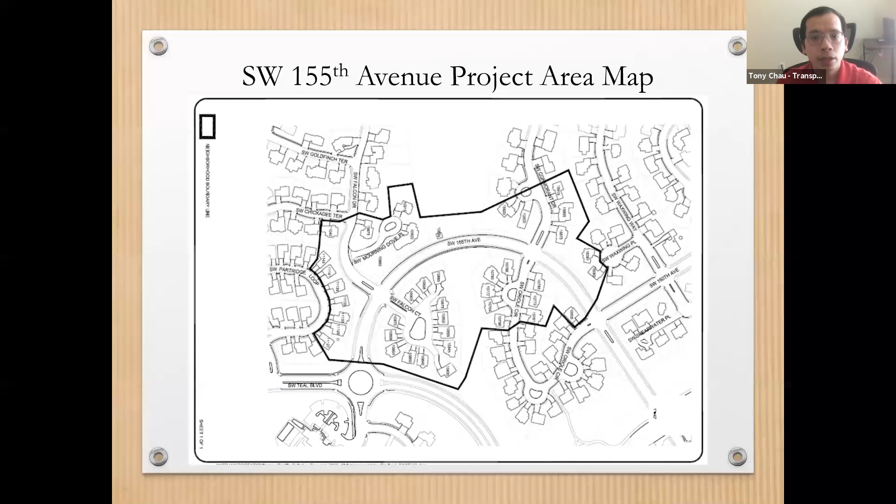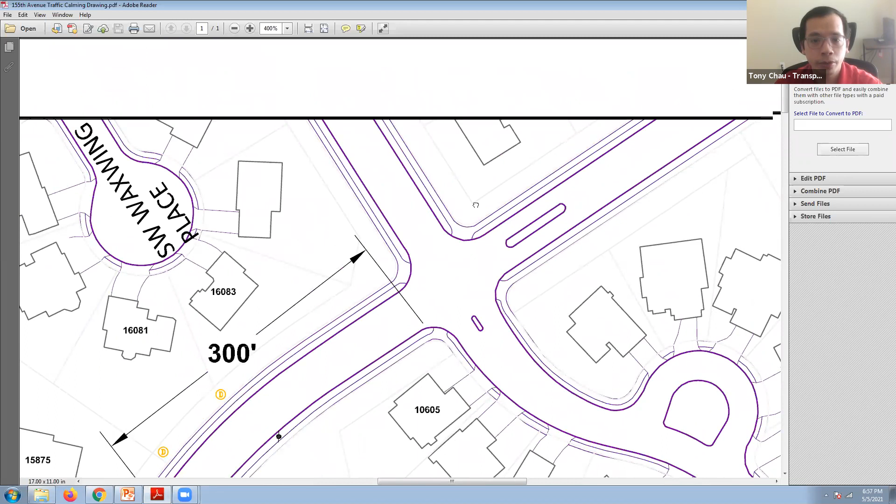These are the locations we picked out for traffic calming, and I'll show you in more detail. Going location by location, the first location we picked out starts from 160th Avenue, at the all-way stop control at 160th Avenue and 155th Avenue. If you go 300 feet, the first location we picked out is 15875 Southwest Cormorant Drive or 10785 Southwest Oriole Circle.

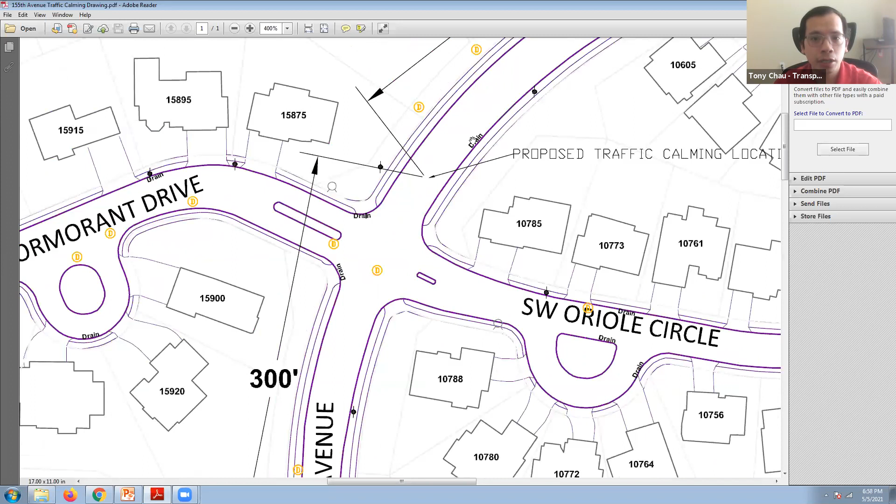On the map you see a lot of random icons: this is a storm drain, this is a manhole, fire hydrant, and this is a power pole or light pole.

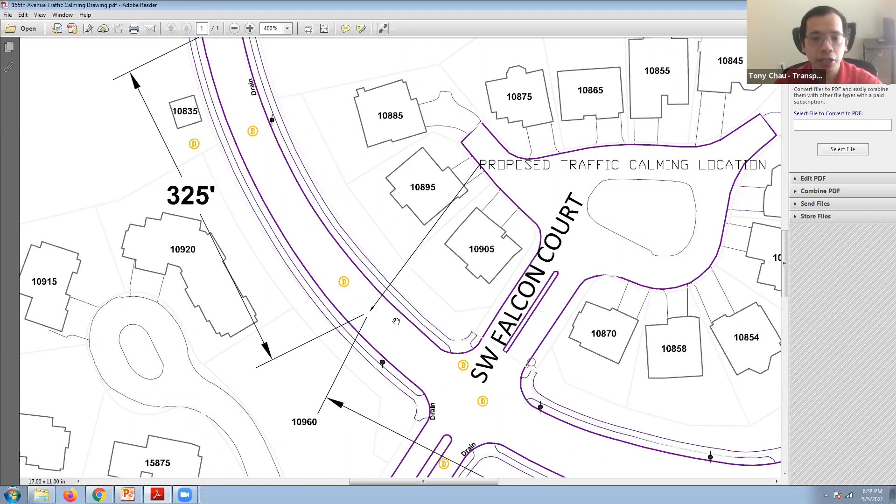As you go further down Southwest 155th Avenue, the second location we picked out is right near the pump house on the curve at 10835 Southwest 155th Avenue. Further down, it's at 10960 Mourning Dove Place or 10905 Southwest Falcon Court. There'll be one more set of speed traffic calming location, roughly 350 feet from the roundabout at Teal and 155th Avenue.

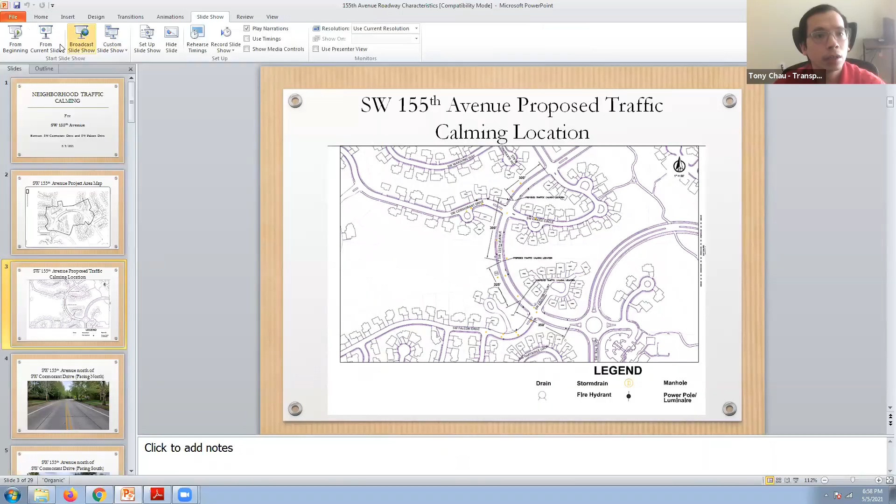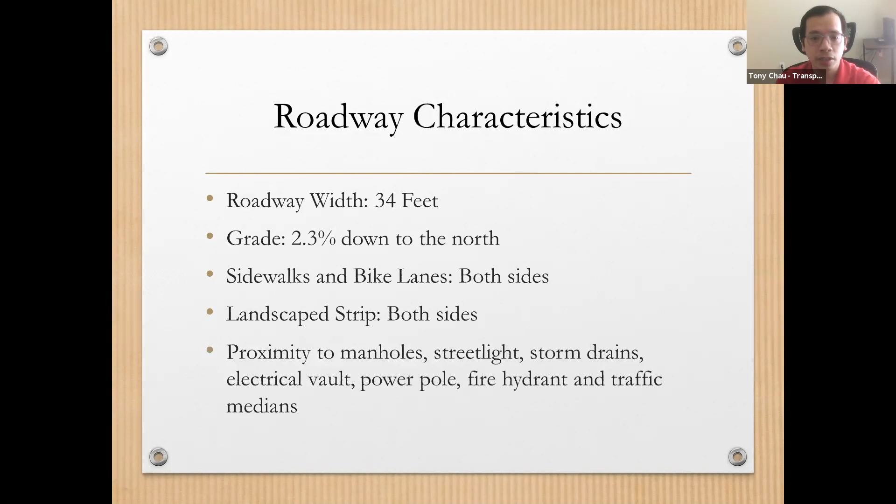The roadway width is 34 feet, 2.3% grade down to the north. There are sidewalks, bike lanes, and landscape strips on both sides, plus manholes, street lights, storm drains, a vault on the east side, power pole, fire hydrant, and traffic medians on the side street that we consider.

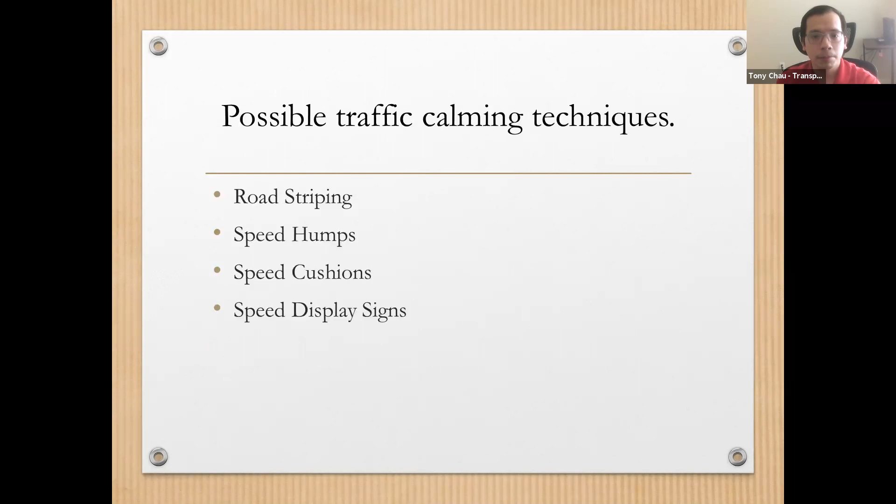This concludes the PowerPoint portion of our meeting. I'll go over the map one more time, location by location, just briefly.

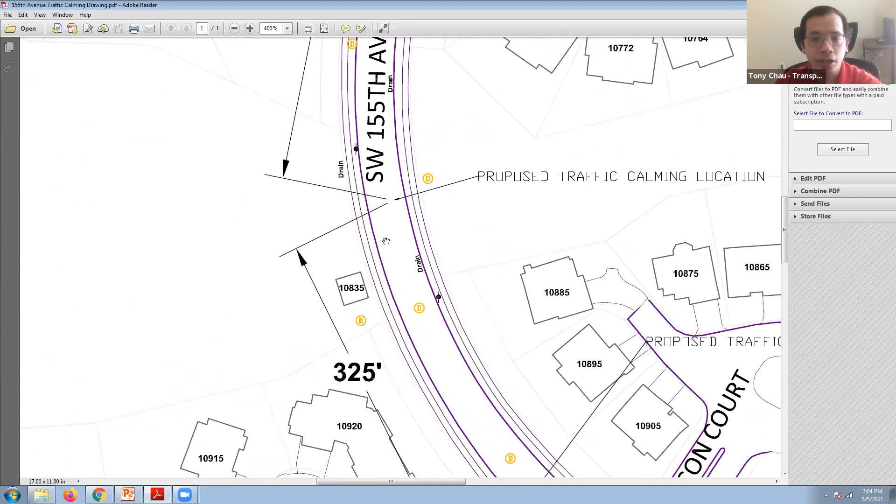The first location is north of Cormorant Drive and Oriole Circle, at these two houses: 15875 Cormorant Drive and 10785 Oriole Circle. The second location is at the pump house, 10835 155th Avenue. The third location is 10905 Southwest Falcon Court, or 10960 Morning Dove Place.

At this point, you'll get to the traffic circle, which is 350 feet away. This concludes the PowerPoint and map presentation part of the meeting.

Mr. Khasho, do you have anything to add?

Mr. Khasho, we can't hear you. Sorry about that.

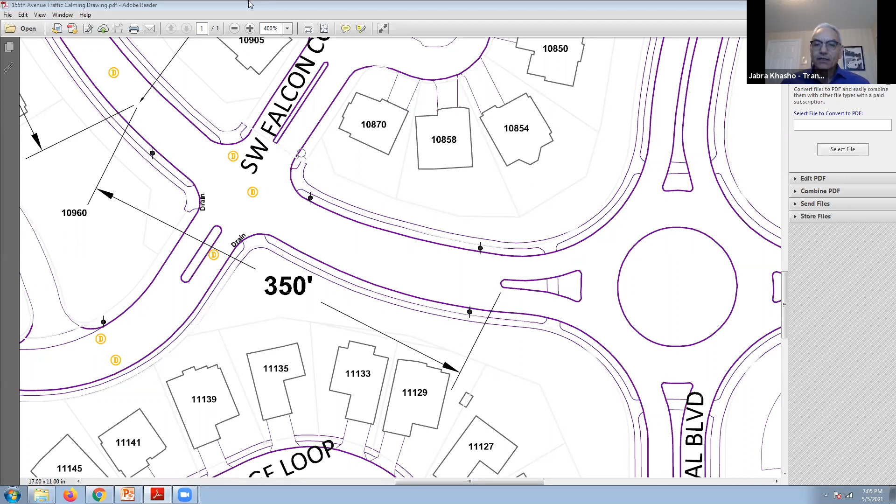We have to look at 155th Avenue, it's a street with bike lanes and a center line. At the last meeting, we showed many options for traffic calming devices and talked about the pros and cons, advantages and disadvantages, for each device. But if you look at the street, we're kind of limited in what we could have there.

We talked about curb extensions and islands. The problem is if you try to put in a curb extension on the street, you'll end up wiping out the bike lane. This is classified as a collector street, so bike lanes are required.

The same thing with medians. If you put a median in, you need at least a 14-foot lane next to it to allow a bicycle and a car to go at the same time. At the same time, you'd be cutting off the bike lane, and that's not a good thing. So we're limited to what we could use on the street.

We could use speed cushions, we could use speed display signs. At the last meeting, I mentioned that speed cushions are probably the best device to reduce speeds and cut-through traffic. Also, speed cushions will not impede emergency response vehicles. I keep mentioning this because it is important.

Fire department, every second is important for them to reach whatever is happening. They have to get there, and every second helps save a life. So that's why I encourage you, if you choose speed humps, go with speed cushions because of the emergency response time. Speed cushions and speed humps have the same effect. They both work, although drivers tend to keep two wheels in the gutter and two wheels on the speed hump. By the time they try to center the car, they've already slowed down.

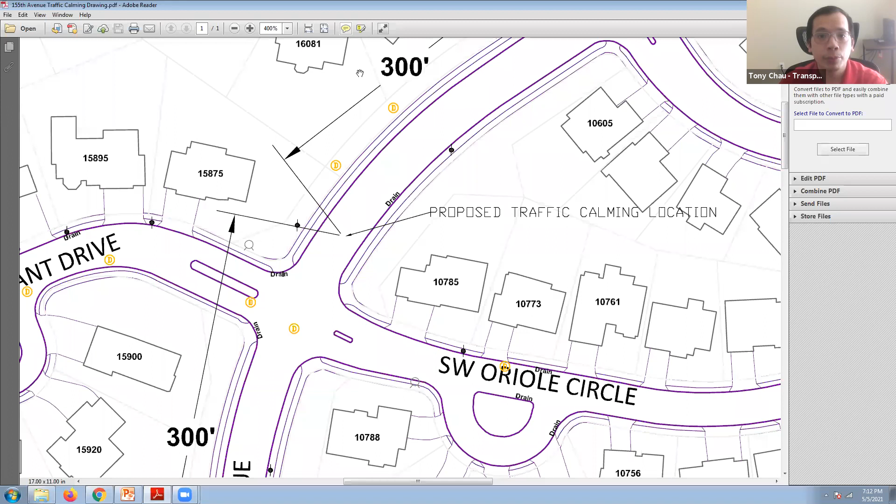We'll give it one more minute for people to provide their input. It looks like the numbers stopped increasing, so we'll take a look at the chat box at this moment. As you can see, on the first one: speed hump cushions, speed cushion, speed humps, cushions, speed humps, speed cushions, and speed cushions. So it looks like the majority of our panelists want speed cushion at this location. Let me double check that, make sure I don't miss anybody. Yeah, it looks like a majority wants speed cushions.

We also have one person with their hand up. Diana, can you speak?

Sorry, my internet was crashing on me, so it's coming in and out. I had a question I put in the Q&A, but I thought I'd ask the group to make this more interactive. I was interested, Tony and Jabra, on how the locations are determined. I got to see you guys out there doing some work last week, which was fun. Also, does it have to be one or the other, or can you do cushions and signs? Is that an option, or is there the option to do more than just one?

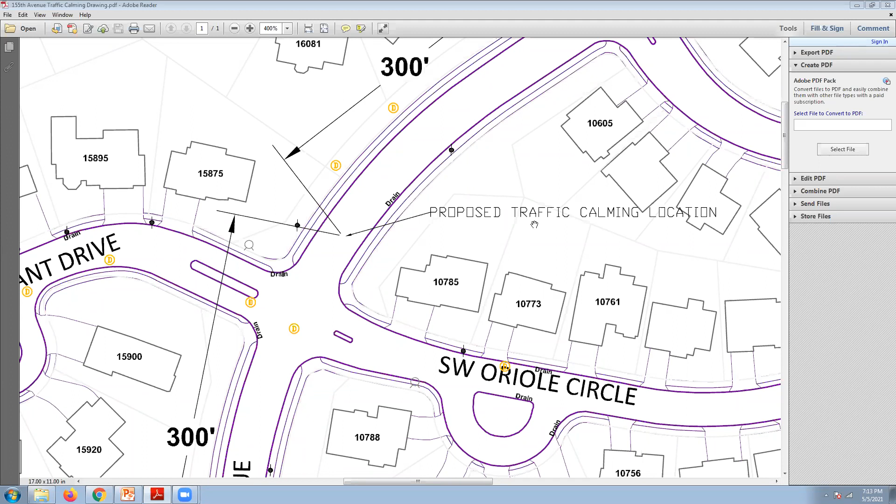Yeah, I'll go back and explain why we choose these locations. Typically, traffic calming devices work best if they're spaced between 300 and 350 feet. We could push it up to 400, but we found 300 to 350 works best. So what we did is divide the street into 300 foot sections. This is the first section coming from Cormorant Drive.

The reason we did not consider anything on Cormorant Drive is that it's an all-way stop, so drivers are basically going to stop and are starting to move from a stop, already at 0 speed. By the time they get 300 feet and up to speed, there will be a device there, like a speed cushion, that will keep the speed slow past that point. That's how we divided the street into sections based on those 300 to 350 foot sections.

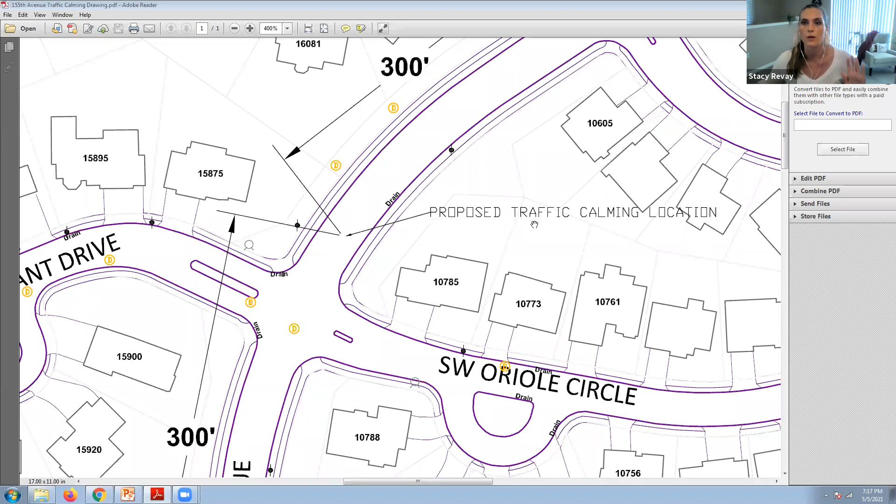This comment about the 325 feet location of the speed hump or speed cushion, that's definitely something we can consider. Let's see—I don't want to miss anything related to speed cushions. One second, Stacy.

A stop sign is already at Cormorant, so I believe you're asking about all-way stop control, which is separate from traffic calming. And once again, the crosswalk—if you do a speed hump, it could function as a crosswalk, like we mentioned at the last meeting.

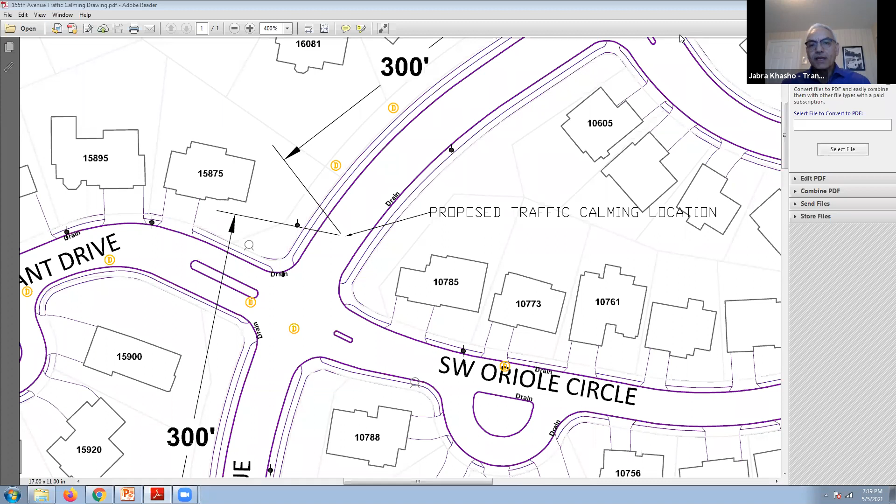Tony, do you know the average daily traffic on 155th? Yes, one second. I'll go back to the slide with the two speed study locations. Here's the first location. The second location has 5,338 vehicles, and that's the one south of Cormorant Drive.

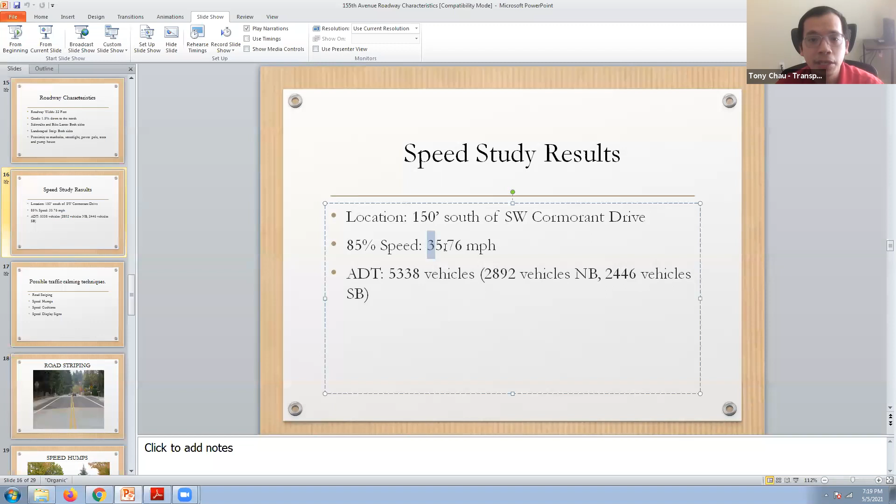And the speed is almost 36 miles per hour, whereas at the other location it's 30.11 miles per hour, and the ADT is about 4,700 vehicles.

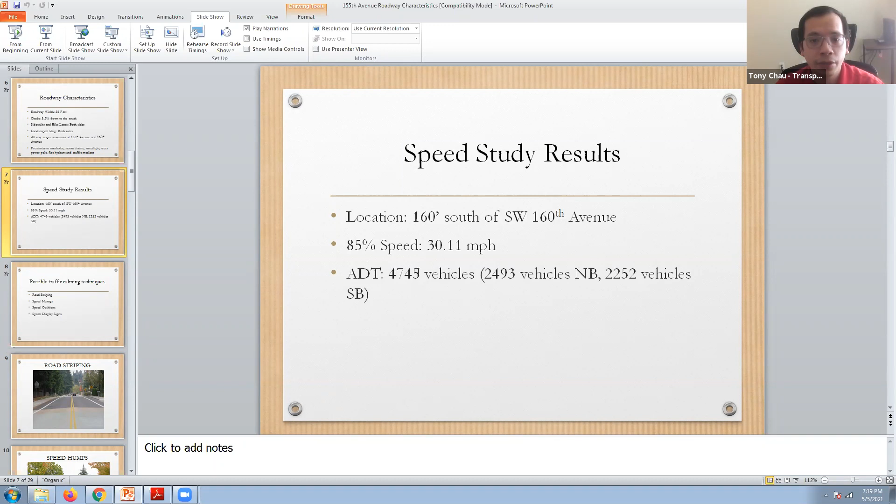So we have some national standards we need to follow on center lines. Typically, if the street has 6,000 vehicles per day, we must have a center line on the street. If it's less than 6,000 vehicles per day, that center line is not needed. If the neighborhood chooses to take that center line out, we could do this.

But we also have to look if there are any sharp curves where the center line is important, especially at night, when drivers going a little fast sometimes start going over the center line and encroaching onto the other lane. So a center line will help with that.

Other things we could do: take the striping out and just leave some reflectors in the middle of the street, which helps take away that feel of a high-speed roadway. We could do this if you want to consider it as part of the plan.

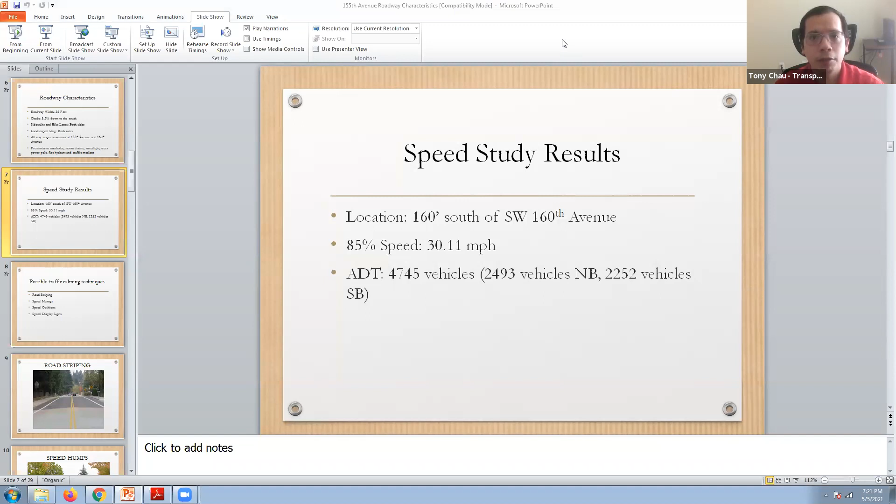We'll go ahead and start with the first question, this one from Steve. I assume traffic count numbers on 155th south of 160th are substantially higher than north of 160th. Is that the reason there are no center lines or bicycle lane lines on 155th north of 160th?

Jabra? I think I just answered this question, explaining the center line option.

Does the city-owned address at 10835 Southwest 155th count as a voting property? It does, but if it comes down to that last number needed to reach the 67% threshold for the project to be approved, that number will be waived, because it's city-owned and we're not supposed to have input on this. But we don't anticipate that number being the difference between the project going through and not going through.

Some studies have shown that removal of center lines on roadways reduces traffic speed. Is that an option on 155th between the traffic circle on Teal and 160th for consistency along 155th? Yes, I explained this, it's an option since the average daily traffic on it is less than 6,000 vehicles per day.

But we have to be careful about the curves in the street, so we have to treat those curves with some type of center line. If it's not a painted center line, we could put some reflectors, which we call buttons that reflect at night. So we could have a few of those around the curves.

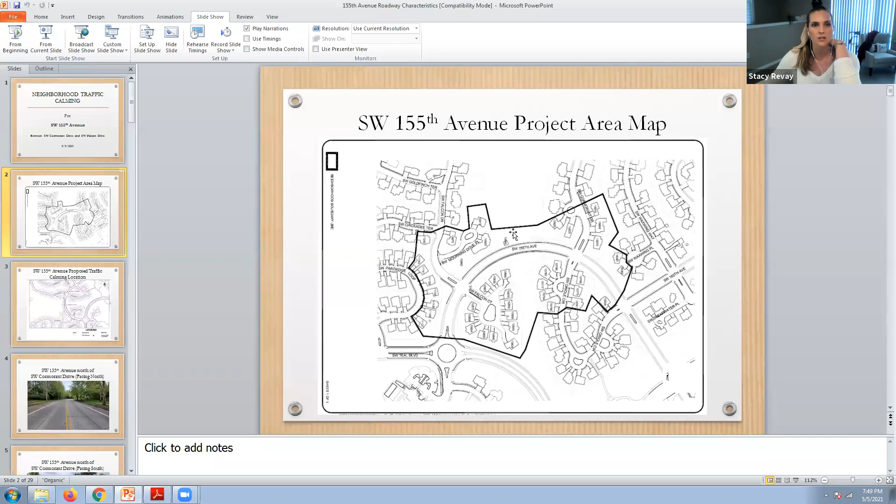The next question, I think we've already answered. Someone asked: are you saying it could take as long as next spring, a year away, to get these installed? I heard the soonest they could be installed would be September of this year. Is that correct? Yes. We will do our best to try to meet that time, but there's no guarantee with the weather.

I assume if we were mailed a notice, we'll receive one once the next meeting date is finalized. That's correct. Once again, when is the next meeting time? June 10th, 6pm, virtually at this moment, same meeting software.

So I have two questions here. One, I'm not really sure what this pertains to, I think it got shuffled in with the others. Something about the timeline question, maybe. Maybe if you can retype your question about the timeline, you may already have the answer, since we talked about that a little bit. And then the other question was, how many houses or votes will there actually be included here? How many votes will that actually be for this neighborhood?